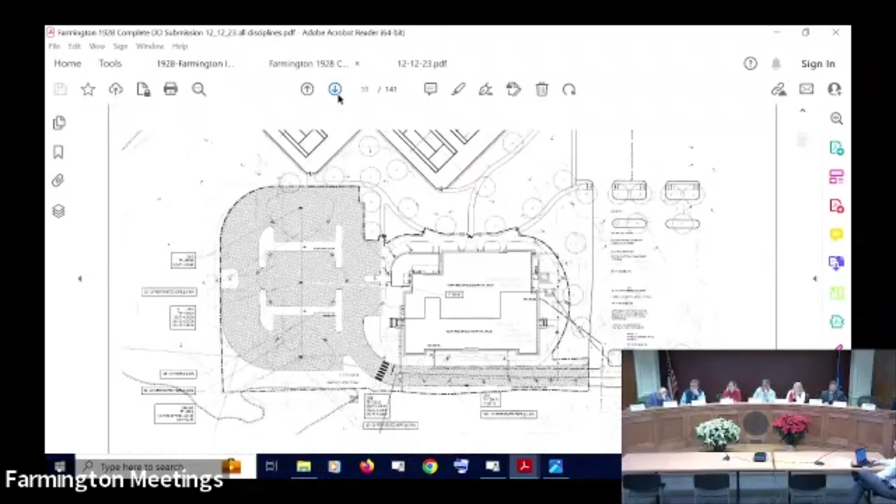At design development, we consider this set to be 50% complete, which means it's also 50% incomplete. But we try our best to capture scope in this drawing set, identifying what the scope of the project is. A lot remains to be done, including detailing, interior finishes, and more precise details.

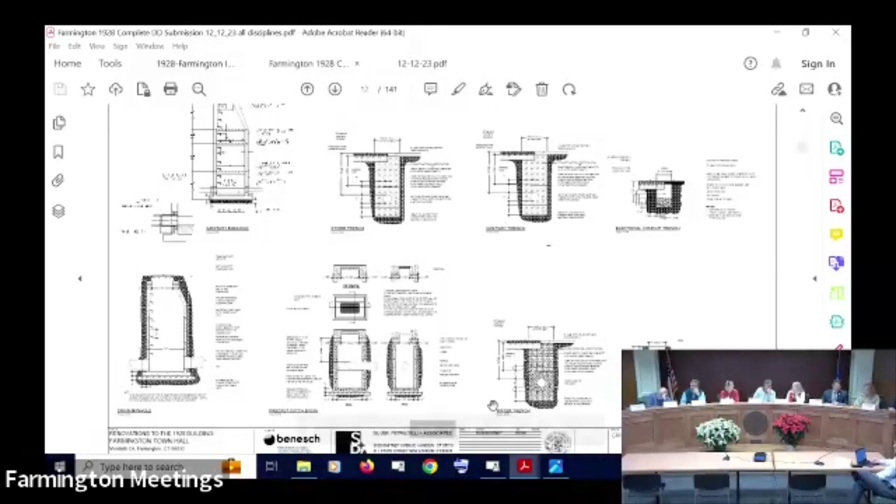The civil drawings are typically more advanced at this stage because we plan to start the land use approval process in the very near future.

These are the structural drawings. Peter or Kathy, I didn't know if you wanted to stop on the floor plans or if there was anything in particular you all wanted to look at in this design development set.

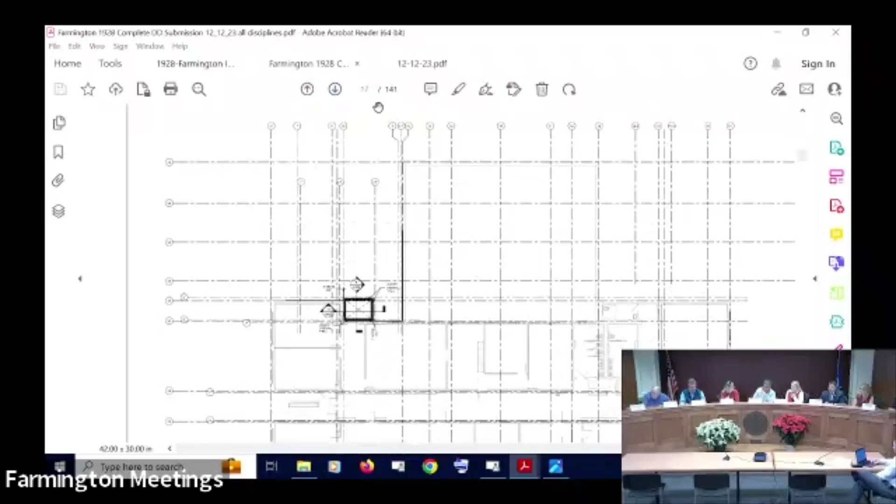Well, probably, I don't think we need to go into construction drawings. Maybe just the floor plan. And the floor plans haven't really changed since the last time you saw them. As you've gone along, have you changed anything? Nothing of great significance.

We're continuing adjusting minor items, like we might move a wall a couple inches so the casework fits a little bit better, but we're not changing layouts, we're not changing program, and we're not really changing the use of any particular part of the building.

These floor plans that were conceptual before and just showed the spaces with some color now are showing column grid lines, starting to show dimensions and tags. So a lot more information continues to get layered on top of these drawings.

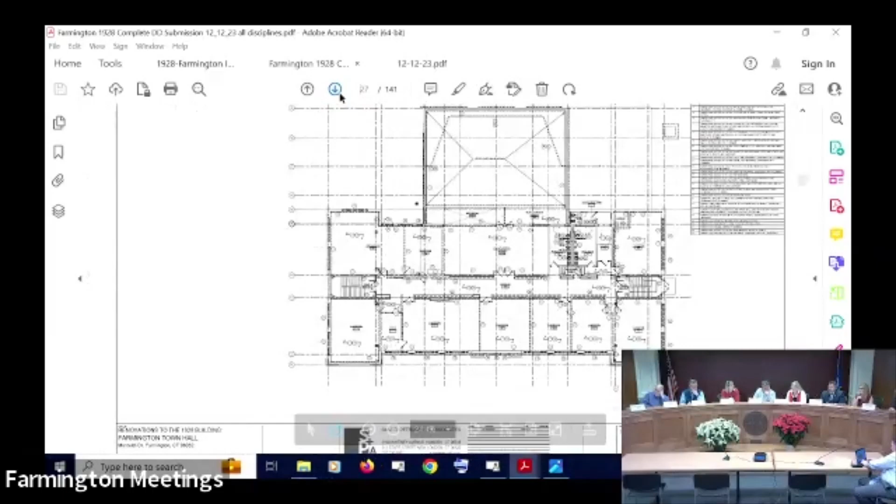These were also sent out today to the third-party estimator, so he has them in hand, and I confirm he'll be on schedule to meet the dates we'll talk about later at this building committee meeting in terms of getting the design development estimate back so we can do any value engineering meetings as required.

What we're gonna do is some interior finishes? Yes. Okay, we'll go into more detail on those documents.

Maybe you could start with the other PDF, Devin.

Just one thing before you go any further, Chris. Chris will review this portion of his report, and then later on we are going to set up a subcommittee. That committee will start looking more in depth at the finishes, carpeting, and things like that, that will eventually go into the building. So this is right now a concept, and this committee will go into this a little bit more in depth.

Chris vetted it with Kat, Peter, myself, and Russ, and looked at some different things. This is what we came out with for a starting point. We figured it would run similar to how we did the entryway. Unless people really dislike what we picked for the beginning part, we figured you'd start there, have the subcommittee meeting, and then fine tune it. So Chris will start there.

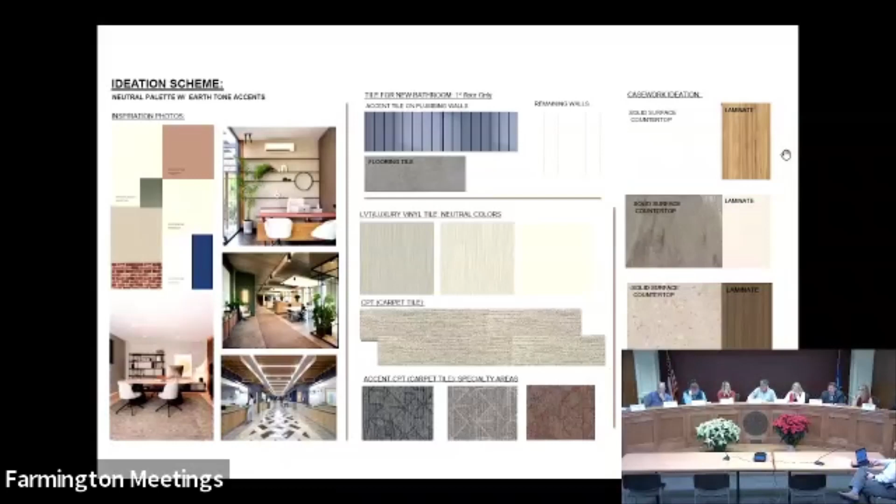The next page shows some initial design concepts of the lobby. I'm going to hold off on talking through these until we see the renderings, because I think the renderings will give a better idea of what that finished space could look like.

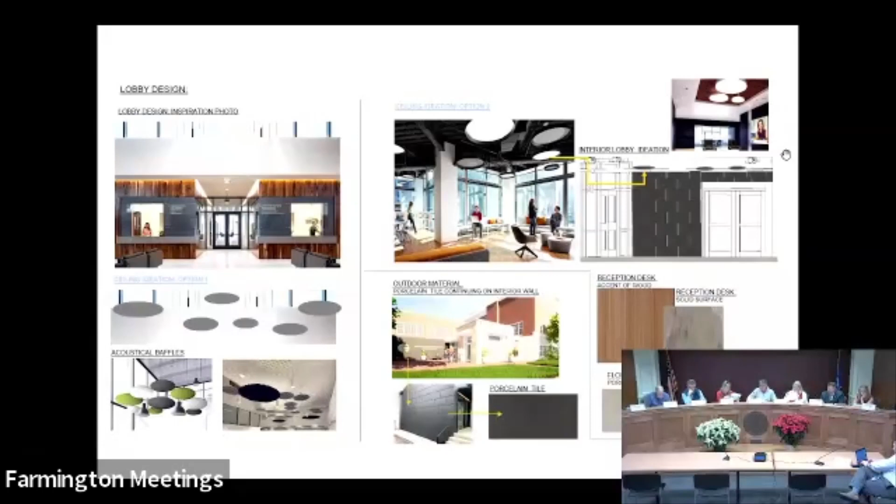Moving on to the next page were some thoughts on conference rooms. Again, we tend to use these spaces with a mix of mostly neutral colors, but adding an accent wall or some accent carpet to bring out some pop in that room in terms of color. I believe we had a rendering of that as well.

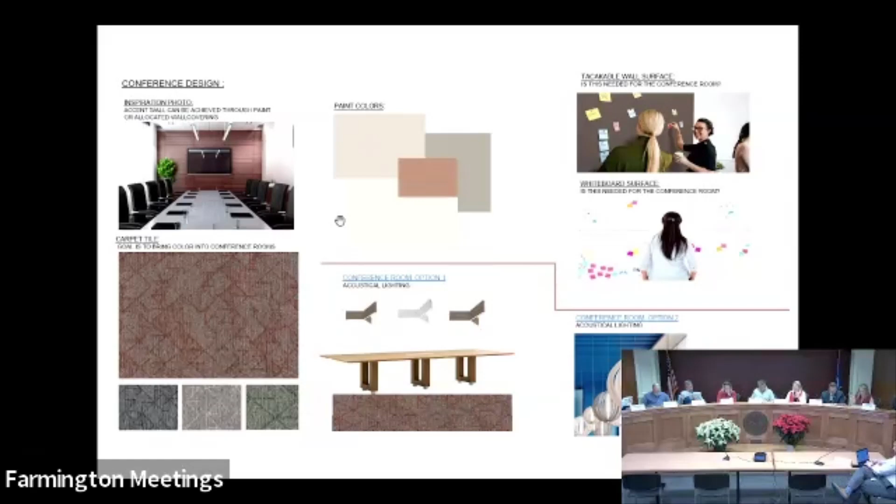But primarily, just as a general approach to this building, as we discussed pre-referendum, your heavy trafficked areas, meaning your corridors and lobbies, the toilet rooms are going to be either that resilient flooring, the LVT, or tile flooring. The offices will primarily be carpeted as you have now, and these will all be carpet tiles, again for ease of maintenance and replacement. If there's any damage or spills, you can just pop one tile out and replace it.

Any questions on that before we move into the renderings? I'm just curious - are there display opportunities, like at West Woods where we put movable display cabinets in, for all the wonderful things coming out of our schools - art, fashion, different things we see a lot?

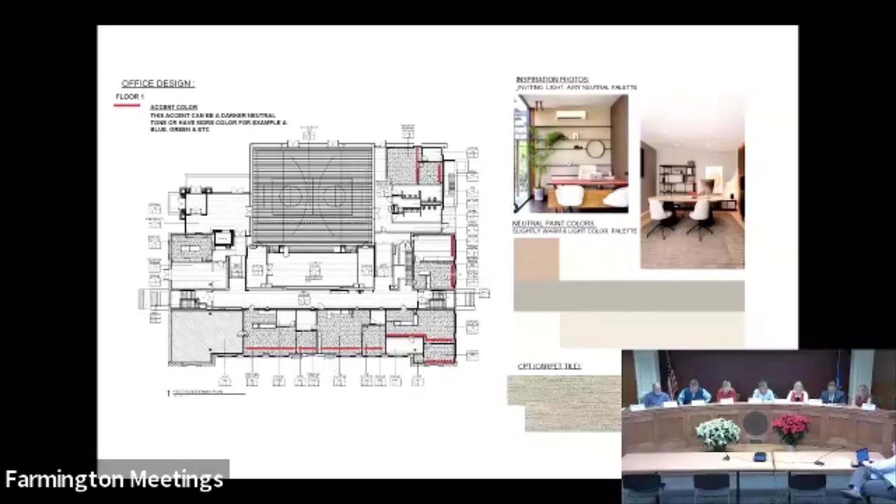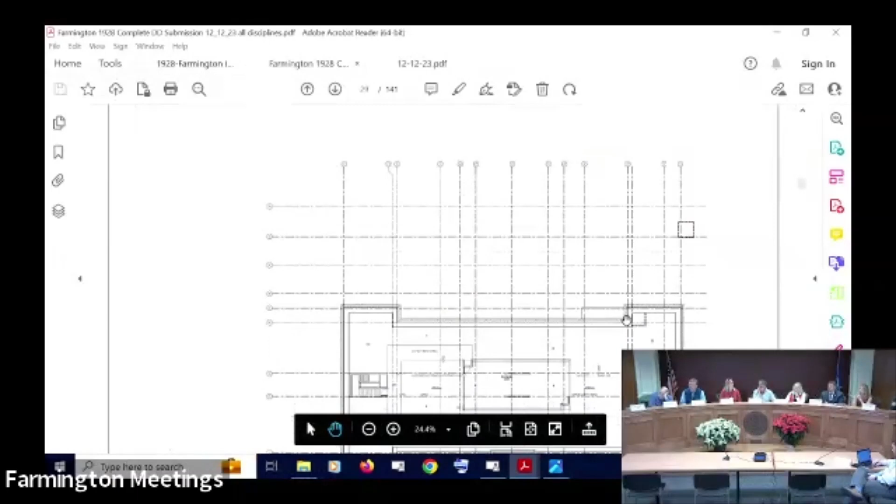Yeah, Devin, if you could go back to the DD set. And then, I'm sorry, I don't know what sheet it's going to be, but it's going to be earlier than you are now, back in the civil drawings. Keep going. Right there, if you could zoom into that entry plaza area.

If you could zoom in a little more, actually.

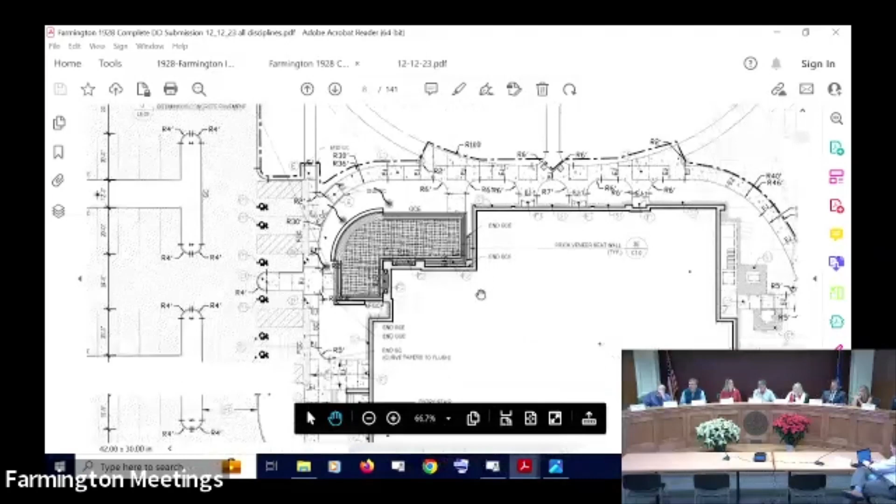So what we're currently proposing are concrete sidewalks, granite curbs at the parking area and at that initial sidewalk as you come up to the building. And then what looks like a gray tone is actually a hatch pattern of what could be pavers.

I know we had discussed the possibility of donations or selling pavers, so that is the area we are suggesting, right in that plaza, where those pavers could be located. We will continue to work through that design with you, whether it's a full expanse of pavers as you see here, or if we break it up with a different material and have insets of pavers.

But I think we could somehow try to integrate what we're doing outside, at least in terms of color and appearance, with what that lobby becomes. You're already doing it with the wall, so I think it's nice.

All right, so let's go to F5, Communications Subcommittee. Kat, Jane, maybe an update of where we're headed with the communication?

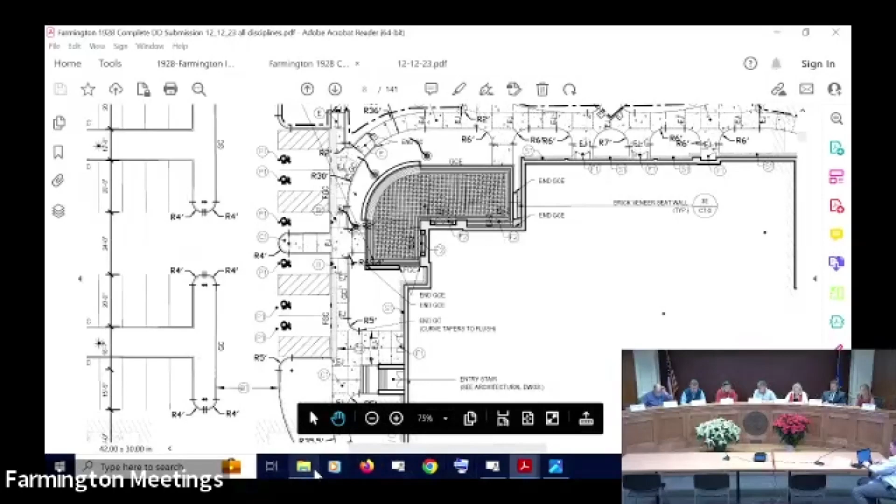We canceled. We haven't met in a little bit. We were waiting for the DD set to be complete.

So what we're envisioning, and it'll be on the 3-month look ahead that we'll distribute in a little bit, is we're hoping to have the subcommittee meet at the January 23rd meeting at our normal time ahead of it. We should have the newsletter content for that, renderings, and we'd be hoping to get a newsletter out to households in February. So trying to, once we get this DD set done, give the community an update at that time.

And good, some renderings, yes, with some of these renderings when they're refined a little bit. Will that be the only one, or are we thinking of another one? I think you're probably going to have another one. Okay, good. Yeah, the sooner the better.

Okay, you guys can work out some dates on that. 23rd, you're thinking? Yeah. I'll be giving out a sheet to have it listed for you. Okay, thanks.

F6, Value Engineering Subcommittee report. We don't have any new updated information. We actually will have a meeting, our first meeting, on January 9th. So next meeting, we should have potentially a more thorough report on value engineering.

F7 financial report, Kathy. You have the attachment, and unless you have any questions, I think we're on target. Any questions?